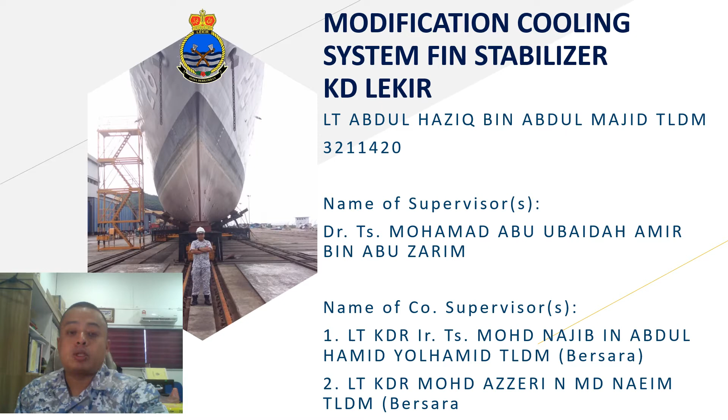Before I go to detail, I want to show all of you my methodology. Starting for this project, firstly I want to understand the literature review. This literature review is focused more on the fin stabilizer and also the problem that happened to the system.

Then after I understand the operational function of the fin stabilizer, I go to the collecting data. Collecting data is very important to understand before and after getting the result. Firstly, I must get the operating reading sheet from the staff to get the reading on the temperature and the flow rate of the cooling system.

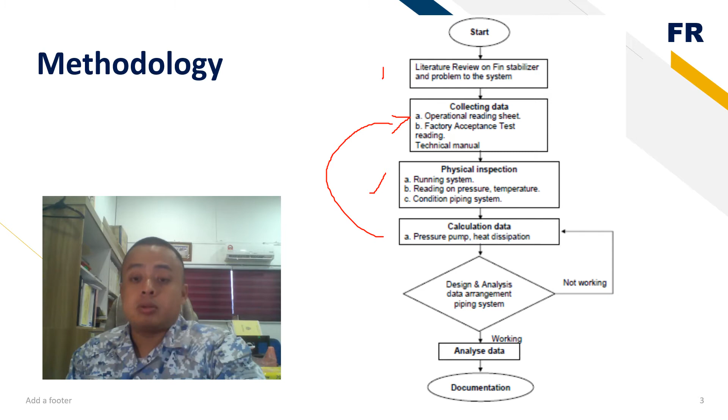Firstly, we must understand this fin stabilizer is designed by Blohm+Voss Industry, and the model of this type is FK. Why FK? Because firstly it's fitted with anti-vortex tip fairing to prevent energy dissipating vortex cavitation. Actually, this design is slightly the same as an aeroplane fin, to ensure not any...

Next, the mounting frame is accurately shaped to fit the hull line, and lastly this type of fin stabilizer has an independent lock system which keeps its neutral position by hydraulic, mechanical lock or mechanical locking.

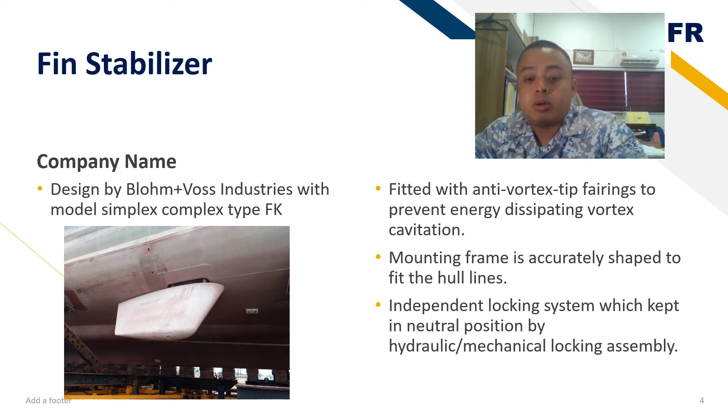Next, we go on to the technical data. Based on the technical data, we focus more on the cooling part. As you can see, this is the cooling part of the system. The cooling capacity is 20 kilowatts.

Cooling medium: water. For this equipment, we are using a seawater cooling system. The flow rate for this system is 10 meter cube per hour. Water pressure is 2.5 bar, and cooling water inlet temperature is at 38 degrees Celsius. This 38 degrees Celsius is based on the FAT acceptance.

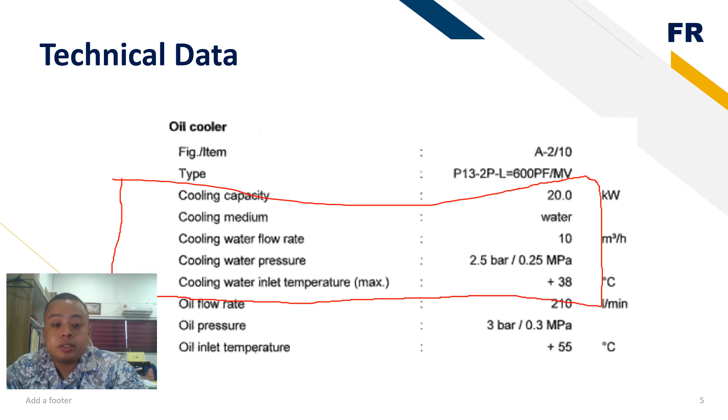Before we go on with the project, we must understand the literature review. For this project, we focus more on three calculations: first, the first law of thermodynamics, Q equal to mc; and also heat dissipation of a heat exchanger; flow rate, focusing more on water flow; and lastly, pressure pump.

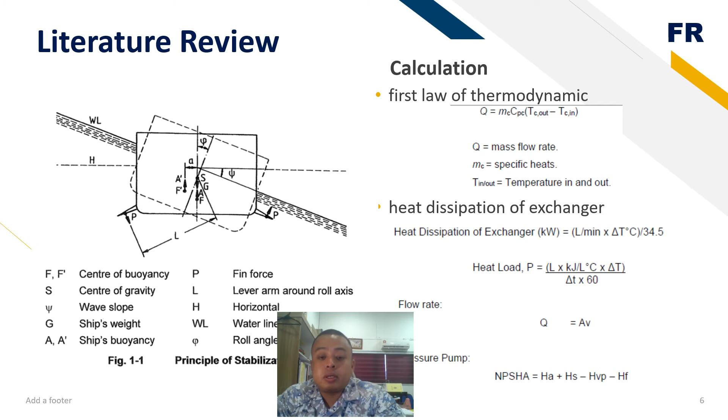Heat will affect the temperature. The flow rate, as I said before, we focus back to the flow rate of the water, and lastly, pressure.

We go to the project.

The fin stabilizer of the ship is used for helicopter landing and weapons. It's used for damping the rolling motion of the ship when rough sea happens. The operation for this fin stabilizer is separated into two parts: electrical and mechanical. We focus more on the mechanical part. As you know, this fin stabilizer is very important, especially for the warship, especially when using the weapon to get accurate reading.

What actually happened to the fin stabilizer? This fin stabilizer, when running the operation, can reach up to 60 Celsius, which is the maximum temperature that can cut off the system.

Because of that, we suspect the size of the cooling pipe, because this fin stabilizer operation consists of CPP, stern tube, and also ECU system. That's why, to overcome this problem, we have to check back on the calculation requirement, also the physical inspection, and make analysis to overcome the problem, to ensure that the system can operate at a consistent temperature.

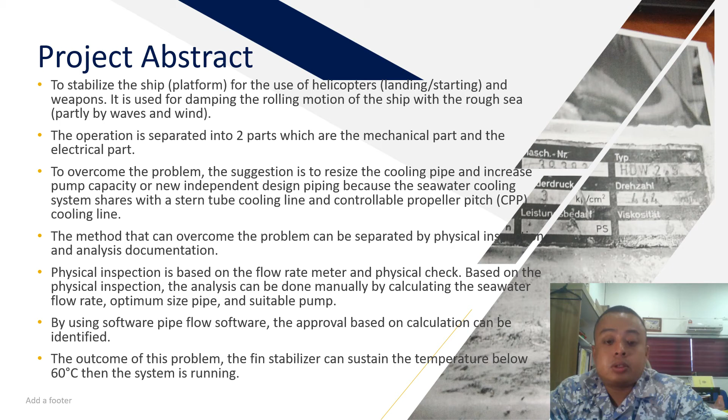As I said before, this fin stabilizer is separated into two parts, Part A and Part B. Part A focuses more on the mechanical side, Part B focuses on the electrical side.

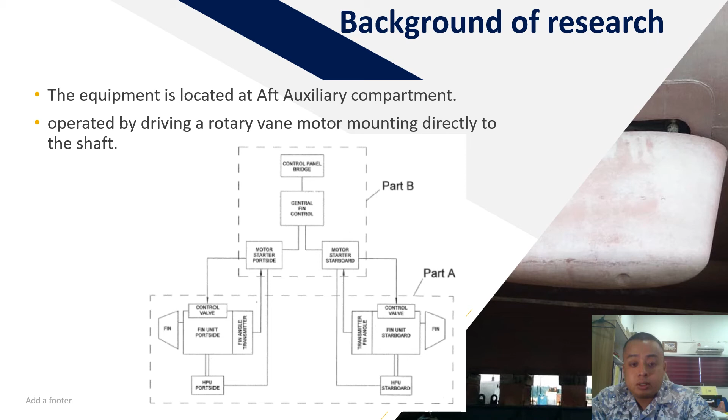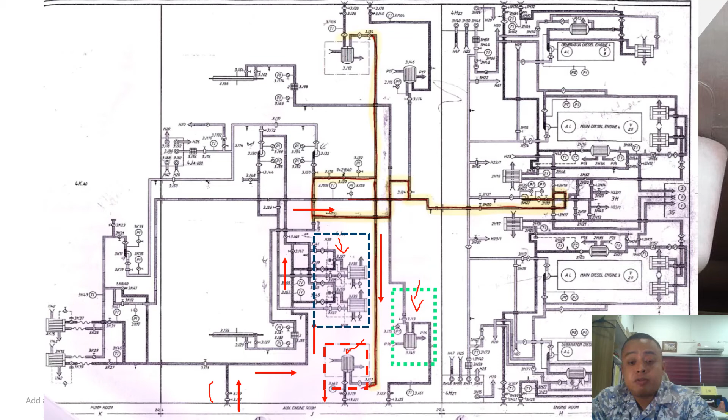Problem happened - why I want to do this research? Because during the running system, seawater supply from the pump to the fin stabilizer is suspected to be insufficient in pressure and flow rate. Because of this issue, the temperature goes higher than 60 Celsius, and because of that, the pipe and pump supplies for the cooling system are not suitable, because the problem happens when all systems are running. That's why - because one line covers three systems.

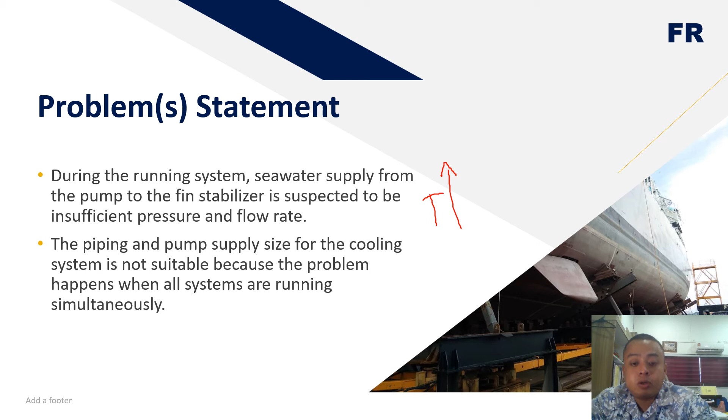The research question is: is the current flow rate and pressure of the cooling system sufficient for the operation of the fin stabilizer? Second, can the size of the piping cover the whole system? And lastly, how to effectively analyze the cooling system?

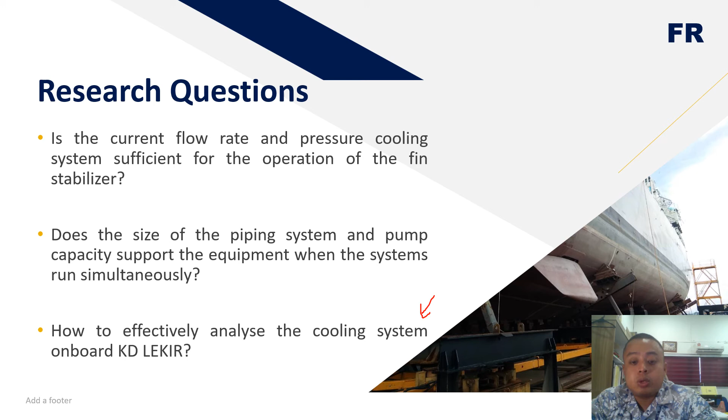At this stage, we will suggest a few systems to ensure that the system can operate normally. From that, the objective is to analyze the flow rate based on pressure by calculation. This is based on calculation, and then optimize the design of the piping. From the calculation, we come up with the solution, and lastly analyze the cooling system using a specific method to approve the system.

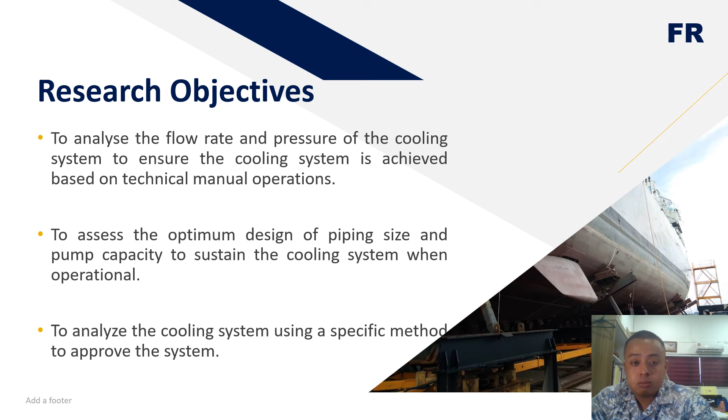We are using software to get the result. The scope of this study focuses on modification of the piping system to get a good flow rate and pressure to ensure that the temperature can stay constant when the operation is running.

The limitation of this project is analyzing using the software, because this type of software is not used by all industries, only a few industries use this. The data collection is based on the operational reading we get, and lastly, this project is focusing on the support system for the main fin stabilizer.

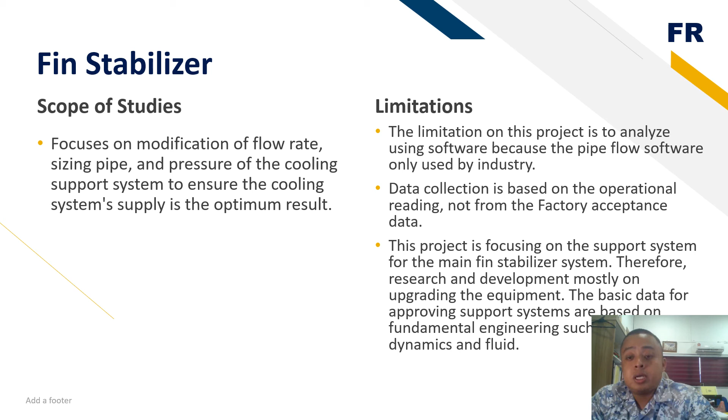Therefore, research and development is mostly about upgrading the equipment. This means we are not focusing on the system of the fin stabilizer itself, but actually we are focused on the support system of the fin stabilizer, which is the cooling system.

After we get all the data, all the analysis, and all the suggestions, we come up with the solution and expected solution for this project.

As you can see, this is a graph - before and after. Before, running was only 1 hour, but before modification, after 30 minutes it would cut off, less than 30 minutes. But after the modification, we ensure that the temperature will sustain at almost 40 plus Celsius.

Why 30 degrees? Because we base it on Malaysian water conditions. That's why this fin stabilizer continues operating without changing the whole system, because if we want to change the system, it can be costly in time and high in process of modification. But because we are focusing on piping, the cost for the system is very low, and it can also give a positive effect to the Kasturi, because the Kasturi also has the same problem on this issue.

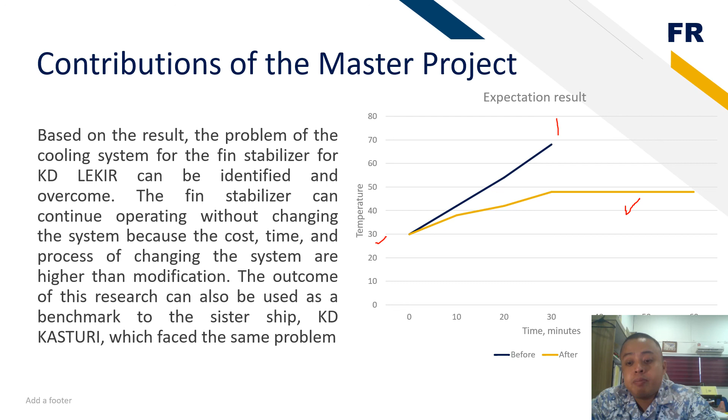That's all for my presentation.

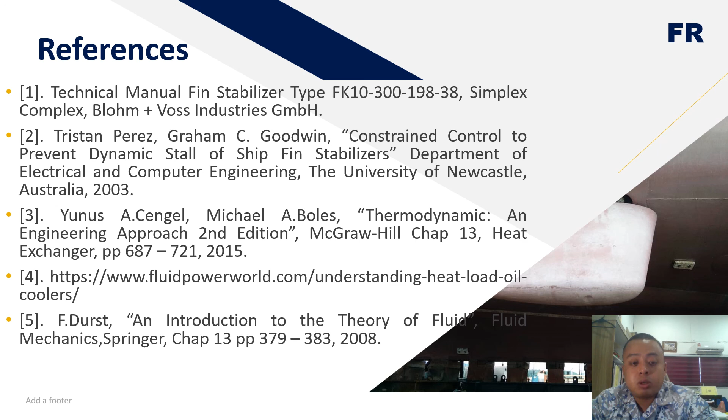These are all my references. We are focusing first on the technical manual, then para 2 and para 3 focus on theory, and fluid power for para 4 focuses on fluid power, and lastly introduction of theory of fluid. That's all for my presentation.